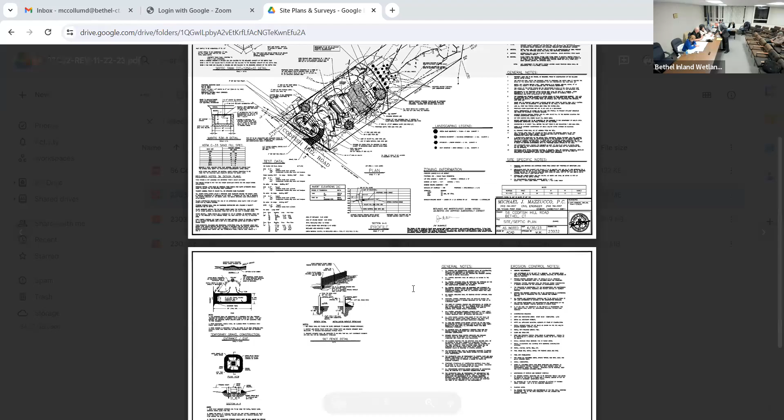And at the previous meeting, we submitted a draft revised plan. And we addressed the majority of the staff comments and the comments from the consulting engineer. And we talked about plantings. And I was waiting for Jim McManus to get back to me, and it took quite a little while, but he finally came through. And so we added a row of arborvitaes and then some other plantings just around the western end, southwestern end of that vernal pool.

Right. And for that, we had a landscaping legend and a few notes in addition to what was previously submitted in the draft. So that's kind of where we are, nothing really major since the last submission. And it's worth the commission noting that a digital version of these revised site plans was given to us last Wednesday, I believe. So they were in the Google Drive. Right.

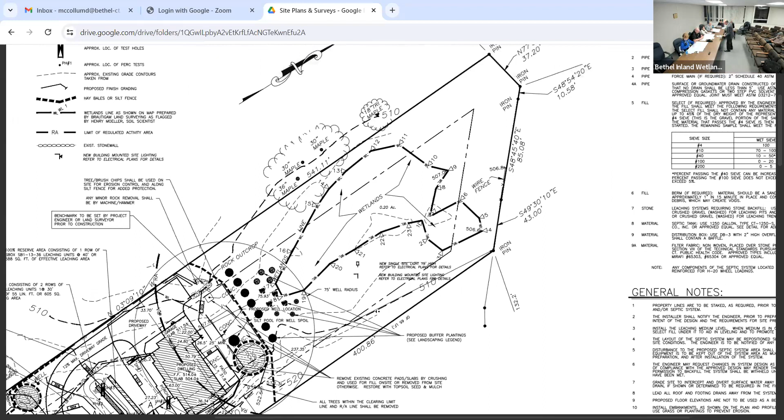So David, did you have any comments? Not at this time. The items that I had requested the engineer to address, the commission should feel comfortable with their responses. The applicant's engineer also forwarded their responses to our consulting engineer, Todd Ritchie from SLR International Corporation. I did not hear any feedback or get any response comments from him, so I'm going to assume for all intents and purposes, he doesn't have anything else to say, unless you guys have anything else that you want to discuss.

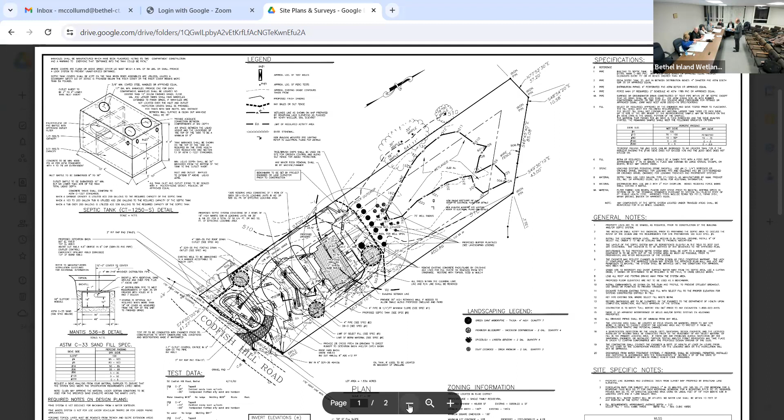I do have a draft resolution of approval that if you guys wanted to table this for discussion later on in the meeting, you can review how that is written at that time. Okay. Anybody else on the commission have any comments? No, not at this time. No. Nope.

Nico? Is that Nico or your dog? Oh, Joy has comments. That's the dog, but no, I'm all set right now. Thank you. All right, thank you, Nico.

All right, so I guess we can table this for later in the meeting, or should we take a vote now? I would table this. You do have a busy agenda. I think it's in the interest for everybody to keep things moving. And we can discuss this. What I would recommend is that you make a motion to table this and reconsider any drafts under your business items later on in the meeting. Okay, so yes. All right.

For the draft, do I need to stay around? Oh, if you would like to review the draft, I have hard copies, if you would like to take a look. I just don't know if I need to stay around for that. You guys may want to amend how the draft is written. I would want to confirm with you that the conditions as I've drafted them are okay. If you feel that there are any revisions that you'd like to make, of course, I would let you know what those are. Sure. If you want to stay, then I certainly wouldn't discourage you from doing that.

All right, can I get a copy of it? Sure. Yeah. Thanks. I'll just take a quick look at it. If I feel like I should stay around, then maybe I will. If not, then let David know. Okay, okay, very good. Thank you, Mike. Thank you.

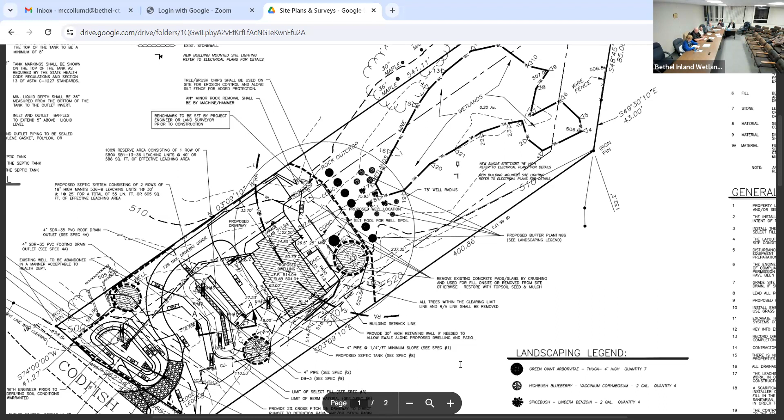Right, so I make a motion that we table Codfish Hill to later in the meeting under business items for review of a draft of approval. A second. And all in favor? Aye. Nico, you still with us?

Is anybody with us? Yep, there is. I don't know where Nico is at the moment - his camera and microphone are off. Sorry, guys, technical difficulties. Is that better?

You able to hear what was brought forward? We're going to table this until later in the meeting to go over a draft resolution that David typed up.

Okay, next on the agenda is 42 Nashville Road. And who do we have? Steve Trinkus, consulting engineer.

Dave, I want to recuse myself from this one because one of the neighbors is a friend of mine. I would ask you to recuse yourself from the dais if you don't mind. Okay, so I'll go outside. You can either wait in the audience or go outside, whatever's fine.

Steve Trinkus for the record, professional engineer. We received some staff comments from David around mid-November. We provided a response and electronic copies of a response and revised plans on November 17th. He had questions on the E&S stuff, which was already on the plans.

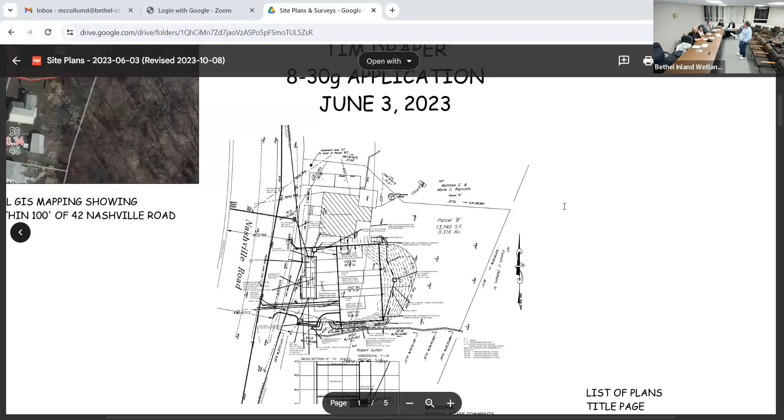The only other issue was locating the stream on the west side of Nashville Road. What I did from the existing catch basin on our side of the road, I went up at 25-foot intervals to the north and south, and from the western side of the road, measured from there to the edge of the stream with a tape. That's how I got the location.

There was an old Farnsworth map from the late 80s, which, having done surveying, I would take with a grain of salt because Farnsworth's work back then was not very accurate. So again, we just didn't pick one location - it's like every 25 feet, I pulled the distance over, and then we plotted it that way.

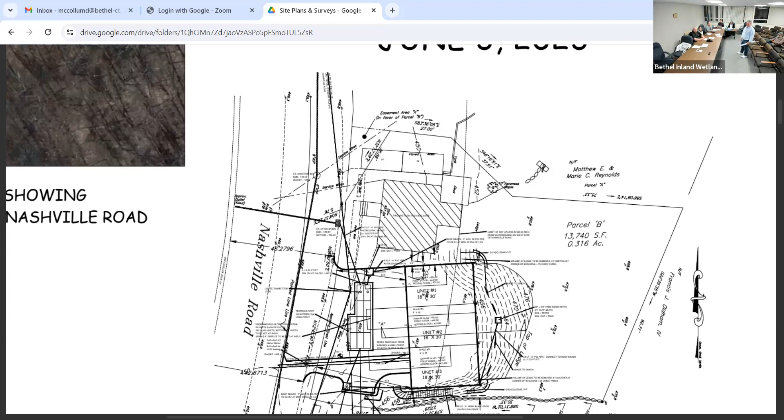Todd Ritchie has reviewed it multiple times, and we've addressed all of Todd's comments. Again, we're connecting to an existing catch basin, which goes under Nashville Road from the east to the west. The test pit that we had for the underground detention is all beautiful bank run sand and gravel. This is more of an overflow situation because I think every drop of water that goes in here is going to go into the ground and nothing's going to go to the town system.

For this application, it's pretty much what Mr. Trinkus said - my comments are my comments. You guys have to consider whether or not you agree with how Mr. Trinkus has approximated the location of the water course with him measuring it with the tape. If you feel that is a non-issue, then consider my comment just my comment.

I would say for every application you have reviewed in recent memory, you have had someone in the wetland science or soil science realm provide accurate information as to where a wetlands resource is. I don't want to dive into this too much because I've already acknowledged the wetland isn't on the property, so you're not really gaining much in terms of knowing where a resource is, but in terms of having it shown on the plans, it's precedent, it's procedure, it's part of what you guys have always done. That's why it was brought to your attention, so if you want to pursue that, you can.

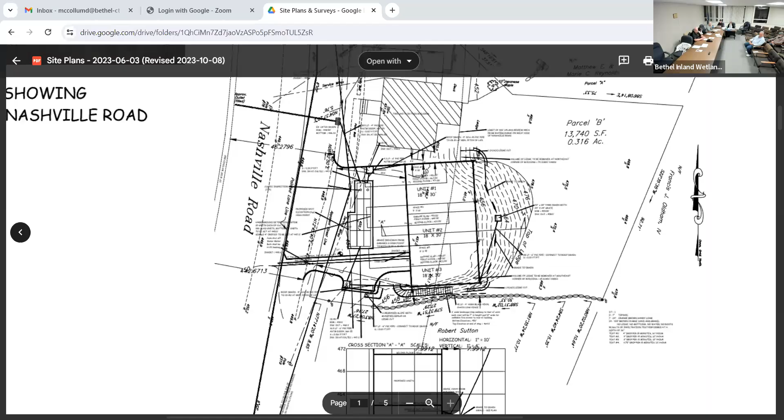The other item included in your staff report - and I will bring up the site plans again - is the scope of the area where work is proposed and where work has been done. If you look at the survey submitted as part of this application, its date goes to June 3rd, 2023 of this year. The commission should consider that this property has not always been in this configuration.

In other words, this area has not always been flat, and this area has not always been sloped. This work to change this, for what I can tell - and I'm putting on my zoning hat here to some extent, but also my wetlands hat...

This work was done earlier this year, before May 2023. You should consider whether any changes made to get the property to where it is now required some form of permit, whether part of this application, under a separate application, or if it needs to be addressed at all. It would be worth having that discussion with the applicant to see what their thoughts are and what your thoughts would be.

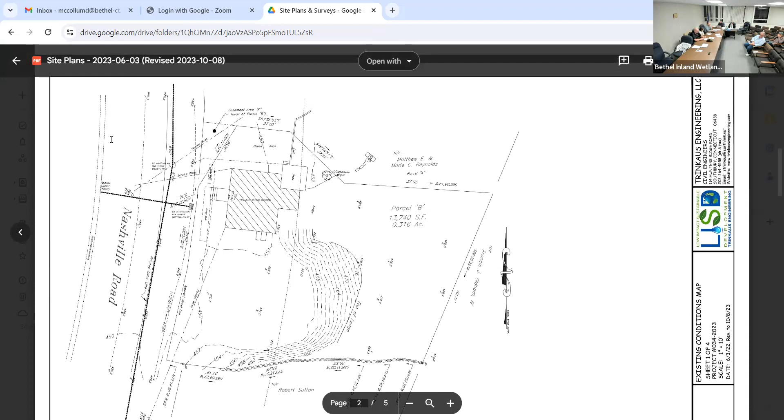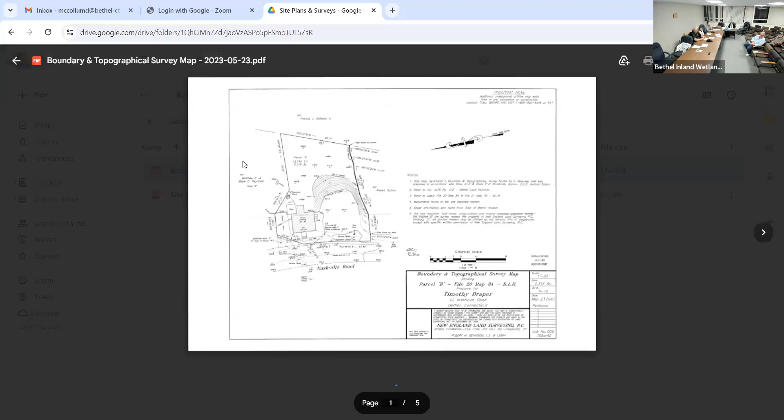Not a problem. So there is a water course across the street from this property on Nashville Road, shown here on this existing conditions map. When the application was submitted to the Planning and Zoning Commission, this water course was not shown on that survey. I will pull that up for you. So there was no trigger for any staff, or for the consulting engineer, Todd Ritchie, who caught it, to say there's a regulated resource and an ensuing regulated upland review area where regulated activities may or may not have taken place.

If that had been caught, then this would have gone to you first instead of the order in which it did, which is where we are now.

Right, so that was said much more eloquently than I did. You're welcome. So my question was...

If I'm understanding you correctly, there was work done before this appeared here, but was the work also done before it went through the permitting process for the other board? With the Planning and Zoning Commission, that's correct. Thank you for the clarification.

You're welcome. Just further clarification for the record: most of the water course on the west side of Nashville is actually piped. We didn't know it was an open channel in that area.

And a couple other points: since we don't own the property on the west side of the road, a soil scientist cannot inspect it, and a surveyor also cannot locate the stream there. A surveyor may only trespass to locate corners for tie-in purposes, not to locate other things like a house. Some owners, quite honestly, having done surveying years ago, even didn't like us looking for iron pins on corners, but we were legally allowed to do that. Other than that, a surveyor cannot trespass.

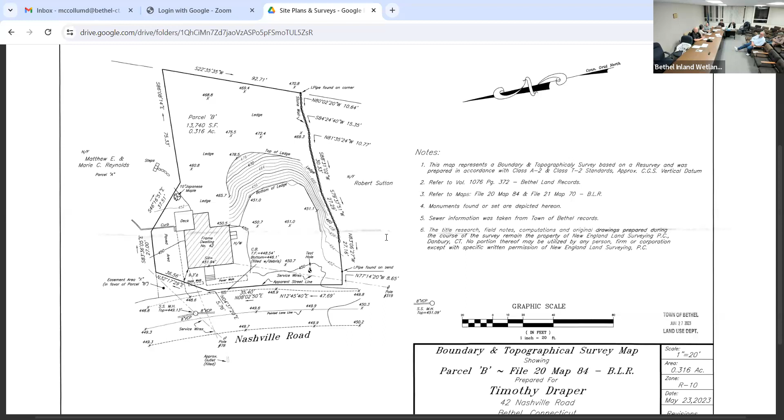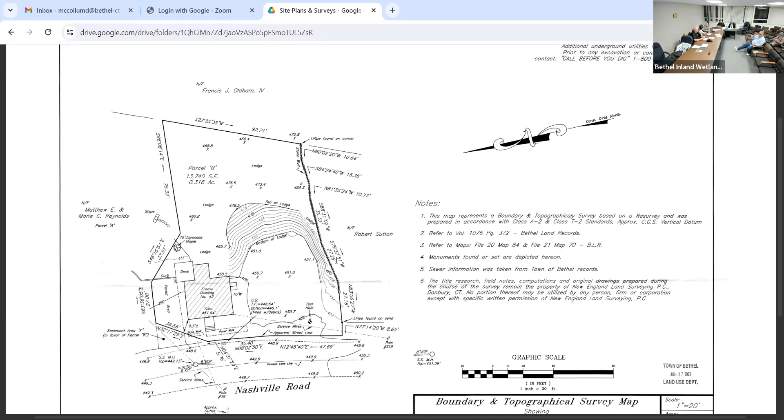When the surveyors, Matt Reynolds, who actually lives next door, went out there, there was some flowing water, but a lot of it comes from the pond further south on Nashville Road where the condominiums are. When the pond does not discharge, there's no water in this water course either. So it was, we missed it. If it was open there, it would have been located, but we obviously didn't. We didn't even know it was in the woods because most of it is piped.

Understood. Thank you.

I don't know if now is the time to ask, but how much of an issue would it be to put it as a stipulation to get a soil scientist, or to have the wetlands delineation indicated by somebody of reference history, so we follow precedent? The owner of the property across the road would have to give a soil scientist permission. If he doesn't, we can't do it. It's as simple as that.

Let's give it a shot. Worst they can do is say no, right? And it doesn't again, hurt that.

It's about what level of information you need to render a decision or to be comfortable with the activities being proposed. If you think a soil scientist is the expert that's appropriate to do that, that's at your discretion. Otherwise, you can choose to have the water course represented through some other means. Previous surveys, I don't know what exists out there. The survey that was located may just be one resource that exists. There's GIS mapping that could potentially be used, not that I want to speak to its level of accuracy, but it's another reference that could be out there. Just so you know what you can consider, what you have to work with.

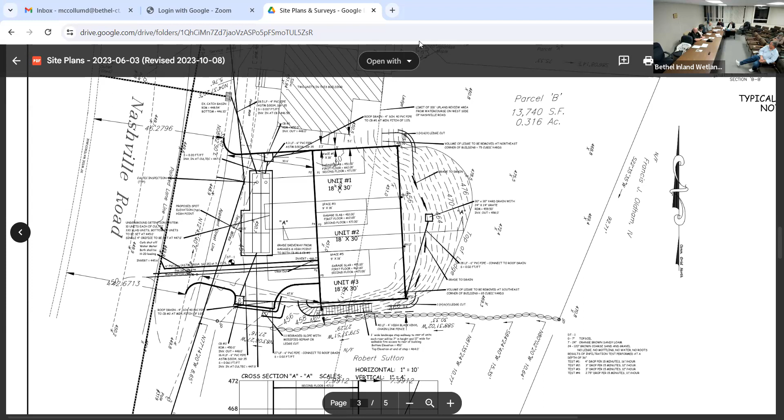Of course, I don't have it in front of me. There it is. The Connecticut Department of Administrative Services Consultants Procedure Manual, which I cited in the response comments I had for you guys. If you go to 3.3.6.1 of those standards, and I quote, all surveys shall be performed by land surveyors registered in the state of Connecticut.

The survey must include all areas that may be subject to construction operations, including access beyond paved roads and staging areas, include sufficient area, minimum of 50 feet from the proposed limits of construction to determine the consequences of drainage and wetlands. That's what that says. How you want to interpret that, it's left to you.

So that says that even if there's a water course or a wetland or a regulated wetland resource off-site from a property, that the applicant is still responsible up to 50 feet, you said? I'm sorry? Up to 50 feet, did you say? Include sufficient area, minimum of 50 feet from the proposed limits of construction to determine the consequences of drainage and wetlands. Okay.

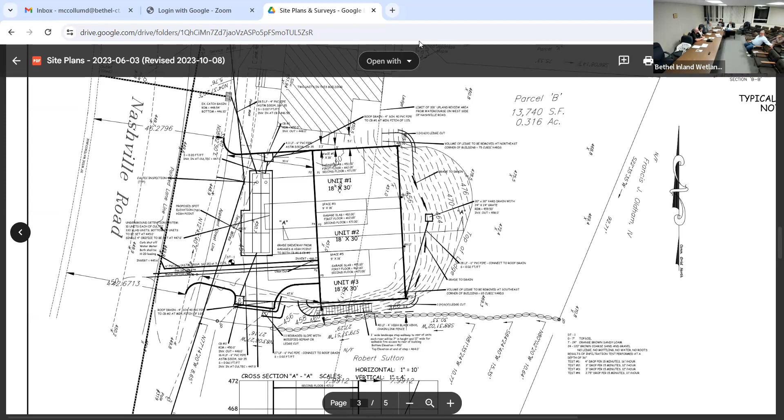Do my commission members have anything to say about anything we've been talking about? In my opinion, it's not a matter of distrust with whether or not the best course of action has been taken to delineate. I also want to take into consideration precedent. Right, and you mentioned that. And it's not distrust for any particular applicant, it's consideration for future as well.

I want to just put that out there, because even though I trust these guys, I might not trust the next person that comes across our table. So to treat one application differently than anything historically kind of puts a bump in our precedent. And I just want to take that into consideration when making that decision. We can ask the owner; if he refuses, it's end of discussion. In my mind, it doesn't hurt to ask.

Yeah. And regarding the administrative services, that doesn't govern what surveyors or engineers do. We're governed by the code of practice under the Consumer Protection Department and what your regulations are. And again, they cannot delineate off-site. You can take it from available information.

I have a site in Ridgefield where they had old topo from years ago. Same issue, off-site wetlands, and we approximated from old mapping and just put a caveat on there: this is taken from town topographic mapping, because that's the only thing you can do. Nobody has permission to delineate on another property without permission, but we can ask, and if it's not granted, then we'll have to work with what we have. To be completely honest, it would just be a disservice not to ask, that's all.

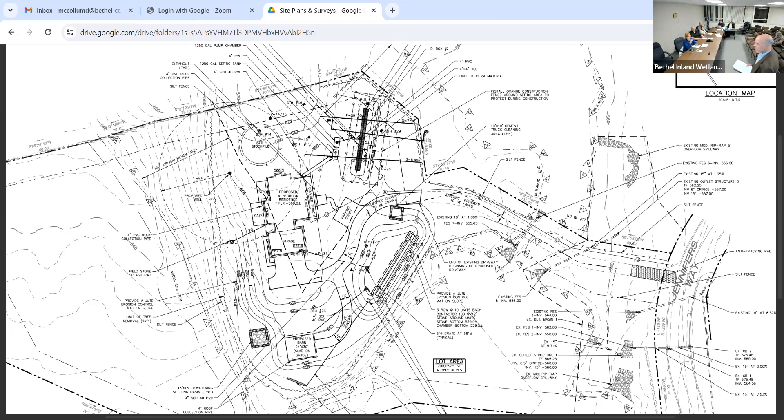So what we added on the plan was the limit of disturbance, which is the cloud line you're seeing across the plan. We added the footing drain outfall, and then we moved the concrete cleanup area as well per the comments. Other than that, those are really the only changes that were made to the plan. We did add the jute erosion control mats in areas where the slope is not 3-to-1, on the east side of the detention area and a little bit here on the west side of the proposed house. So those are really the only changes that were made.

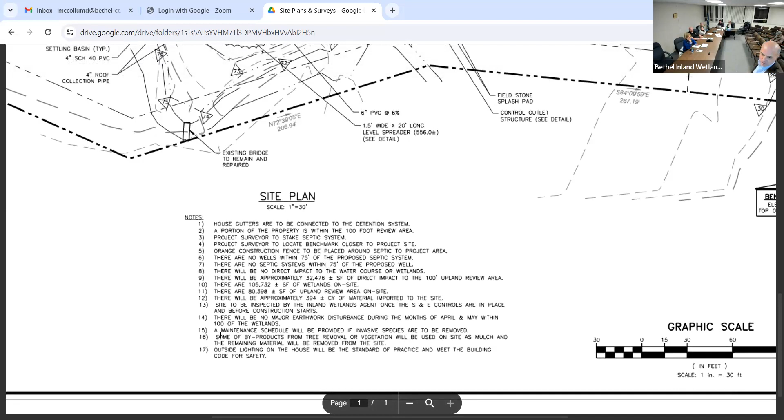I think you slide it up, Dave. Go up. I think we added another note at the bottom down here. So we added the maintenance schedules. We provided for if invasive species are found on the site. Outdoor lighting for the house will be standard of practice and meet the building codes for safety. And then there'll be no earth moving within 100 feet of the wetlands for the months of April and May. It's kind of standard; we had another project I did recently with this commission. And also we added the maintenance operations on the third page, and we revised the S&E control notes as well. So those were the only changes made on the plans from last time.

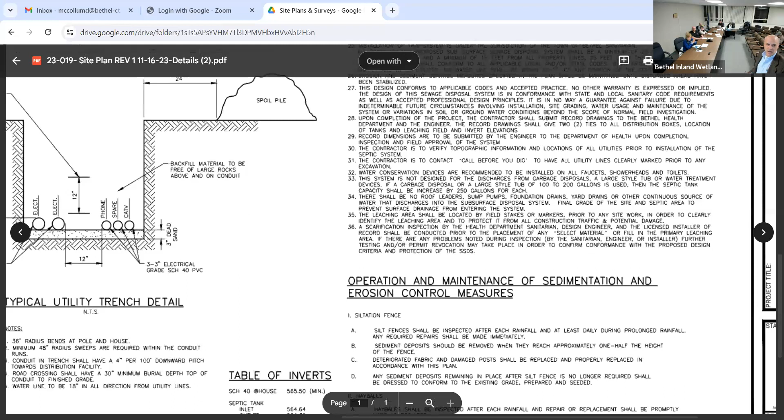I'm trying to find the third detail sheet. Two, sorry. So here's the operations and maintenance we added. Who's assigned to maintain the erosion controls, that would be the owner or contractor, things like that. So those are the changes that were made to the plans. In terms of going through Todd's questions and comments.

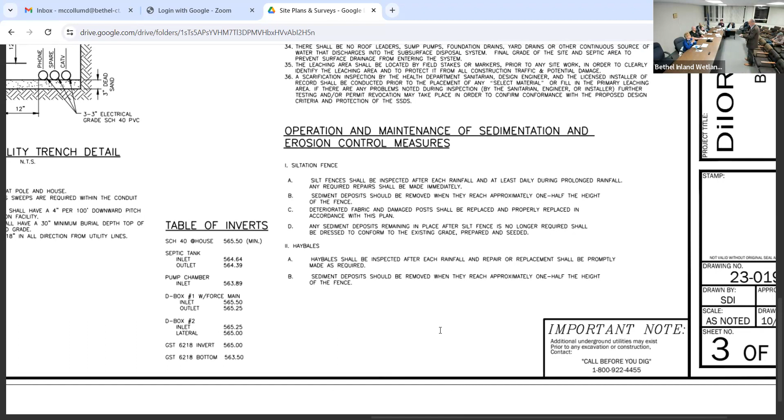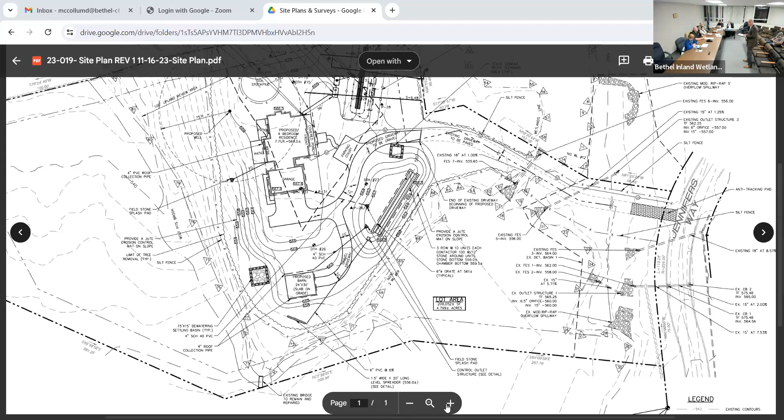At some point, we'll provide a signed and sealed Connecticut licensed surveyor existing conditions map. The wetland delineation, as Todd mentioned, is 18 years old. It's a vacant lot, and we felt that the wetlands haven't really been disturbed or changed, mostly along the brook itself. So we did contact the soil scientist to see if they can prepare something for us. I haven't heard back from him, so that's in the works. The jute mats are shown on the slopes greater than 3 to 1 on the west side of the house and the east side of the detention basin. Footing drains were shown on the plan. Limits of clearing were shown with the clouded area. The cement truck cleanout area was moved from the north side to the south side, closer to the detention basin area.

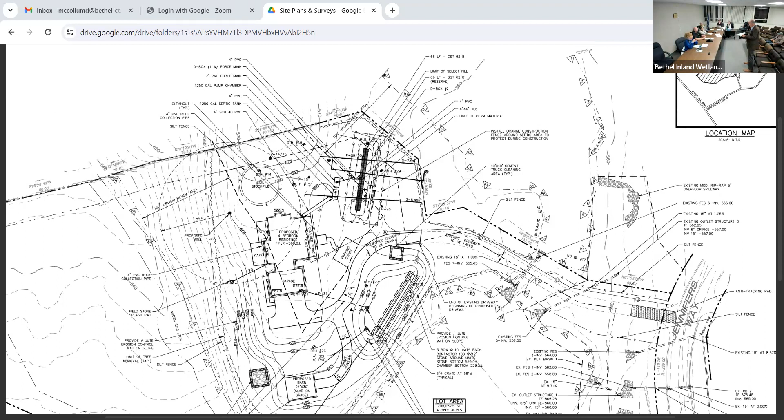And we have contacted the Connecticut DEEP Natural Diversity Database, and we're waiting for a response back on that. Todd has sent it; there is a blob on the map that shows there's something out there, but we haven't heard back what it is just yet. So I think that'll be a condition of approval. Once we hear back from them, we'll let David know what it is and do what they recommend.

In terms of the staff comments, footing drain discharge was shown on the plan. Lighting fixtures, we have a note on there for standard practice for light safety and so forth. Trees greater than 6 inches, we'll remove trees that are necessary within the area of construction. There are some significant trees out there, and our client would like to try to save them, but the majority of them, as you remember walking the site, are not that significant or that big. So we're going to be selectively removing trees out there.

Then again, the wetland scientists, we're trying to get a letter from them about the regulated area we've got on the site itself. A note specifying installation of the S&E controls was added to the plan for operations and maintenance of it. Then also the commission should consider whether or not vegetation buffers should be added to any area of the site, and that's a discussion that you need to make, not something we can provide.

And then again, Todd's asking about the database, or you asked for the database as well, which we're providing. And then we also added on the site plan the driveway to be paved, asphalt. We're showing the first portion, which is currently out there now, where you guys walk down from that point up to Jennifer Way would be paved, and then from that point on to the house would be gravel. So it gives a little bit more of a natural look to it.

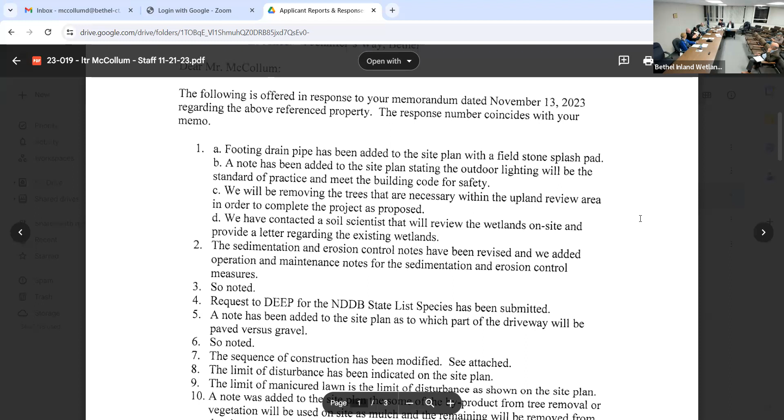Without having the benefit of that report or anything else to that effect, it's an unknown at this point. The applicant has stated that they will abide by whatever the stipulations are, and they legally have to, of course. So looking forward to hearing about the NDDB situation. Can I move on to something else, or did anybody want to chime in on lighting? Oh, go ahead, Nico.

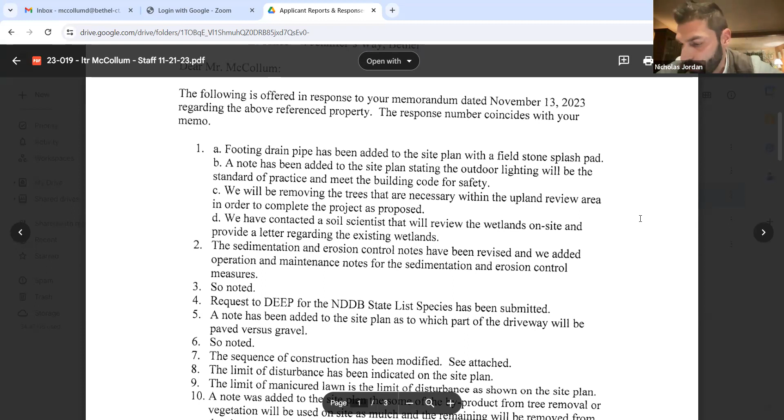What do you have next? Okay, another thing, seeing the paved driveway and then leading to the gravel driveway, what's the drainage situation with the driveway, Mr. DeVesta? I know it's an older driveway and probably needs to be redone, or what's the plan? Because I'm thinking of pollutants and what's best for the wetlands that it crosses, gravel or pavement? And I guess during the construction process is probably the worst time, correct?

Well, the driveway is not gonna be paved until after the project is done. So whatever's out there right now is probably a gravel base. Right now it's all overgrown from 18 years of being neglected. So it will be just gravel down there, a tracking pad at the entrance and silt fence along both sides of the driveway as shown on the plan.

And then after construction, water's gonna run down the driveway and drain into the detention basin itself, and everything is being sheet flowed from the house, and the roof leaders are all being drained into the detention basin itself. Oh, sorry to interrupt. So the driveway is pitched toward draining to the detention basin? Right, correct. The gravel portion is being drained in there, and as you walk the site from Jumper's Way, it's going downhill towards the detention basin itself.

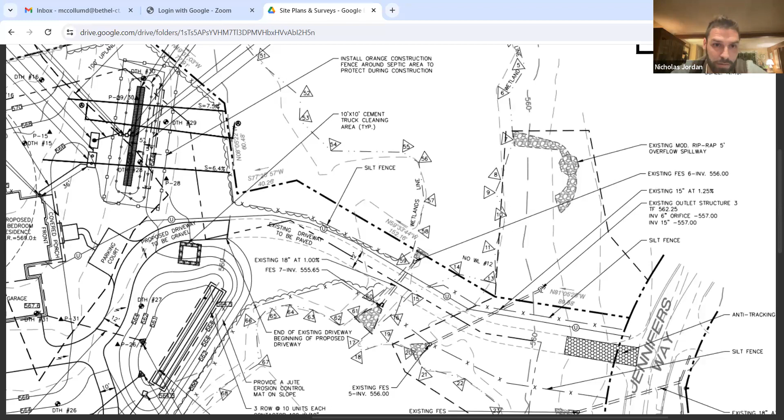Okay. The only thing that I saw was the pipe leading under the driveway connecting to the watercourse, like the wetlands. There were several pipes out there. Again, it was all overgrown. One that was visible was a culvert that ran underneath. This one here was probably existing, that one and this one here is there as well. The one on the right, yeah. With the leaves down, you can probably see that catch basin much easier, but there is a detention basin in there, and also on the south side of the existing driveway.

Nico, did you get your question answered? Because I have some related. Oh, yeah, go ahead. This is our discussion time. So the driveway and the pavement, whether that should be gravel or paved, and the runoff from that driveway, where that's going, that was my question and concern.

Well, the driveway, we could make it gravel further up if you like, but it was intersecting with Jennifer's Way, it's a slight hill there, you want to make sure that's paved so it's easier to maintain, things like that. It might be better to have it more gravel over the wetland. I don't know, from an environmental standpoint, Dave or Mr. Doug, to have that be gravel and infiltrate, it just seems more natural to me than the pavement over the wetland area there.

The idea with gravel versus pavement, it's not so much trying to figure out which one is better per se, because they each have their pros and cons, right? The idea is, if you're going with one in one area, is it designed so that it will not have any adverse impacts to the regulated wetlands resource that's either on or off the property? The question that you're asking, I think, Mr. Jordan, isn't so much where rain is going, so much as where anything that's in that water that would flow off that driveway is going.

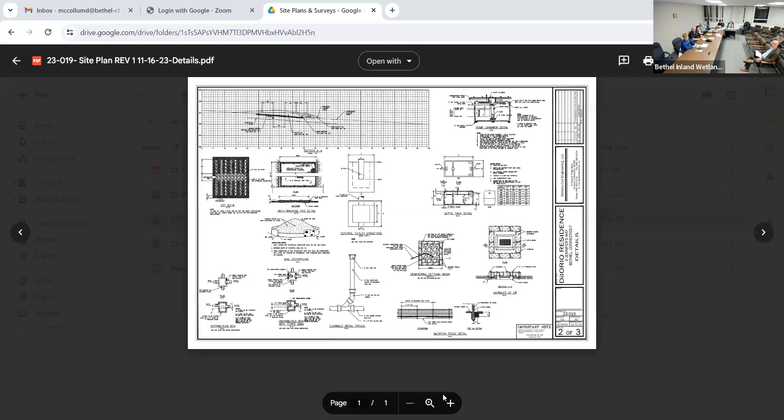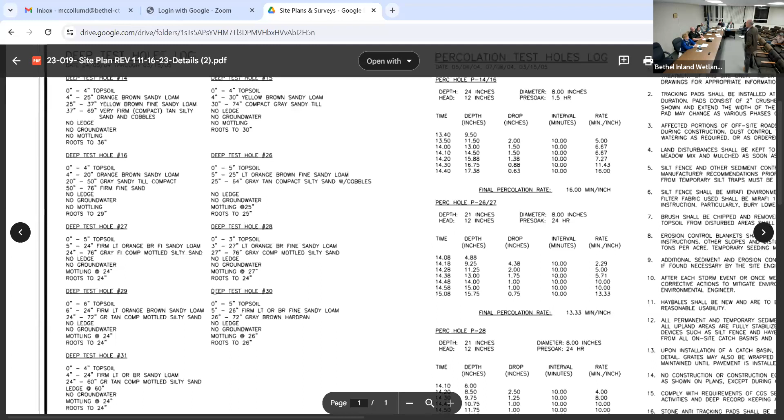Mottling was between around 24 inches and a little deeper in some spots. But that indicates that mottling is a seasonal high groundwater indicator, but it doesn't mean it happens every year. It could be historical. So there's potential, there could be groundwater and there could not be out there. And then the hard pan layer was probably around the same level as your mottling was on most of these holes. Again, there was no groundwater encountered during that springtime when these things were tested.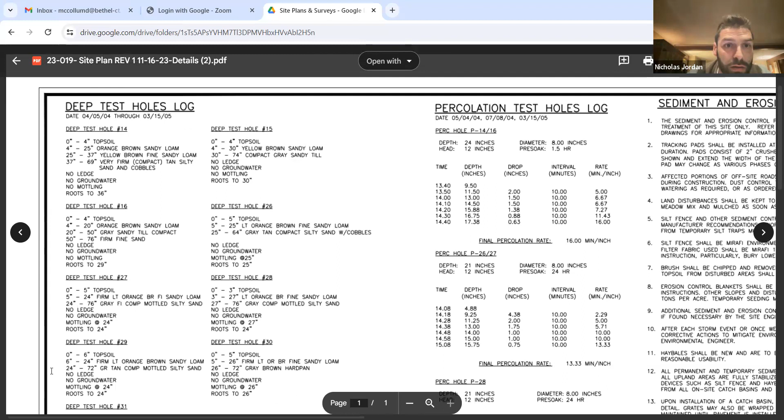And where, okay, and to what depth did the mottling begin? Around 24 inches in some spots, it depends what hole you're looking at. So can you walk me through it, I think it was deep test hole like 29, 30, 28, near where the septic is, right? Back to number 1, Dave.

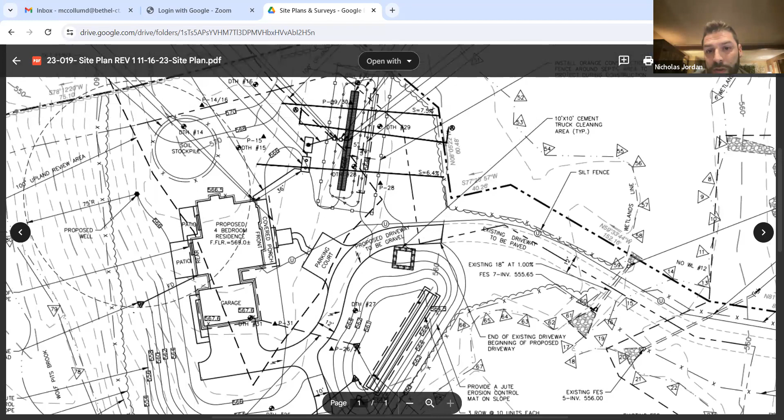What, the septic system you're talking about? Yeah, I guess so. I mean, I'm concerned about the whole site, but mostly that eastern portion. Yeah, 29, 30, here's 30, right, 28, here. 28, 29, and 30. So go back, okay, number 3.

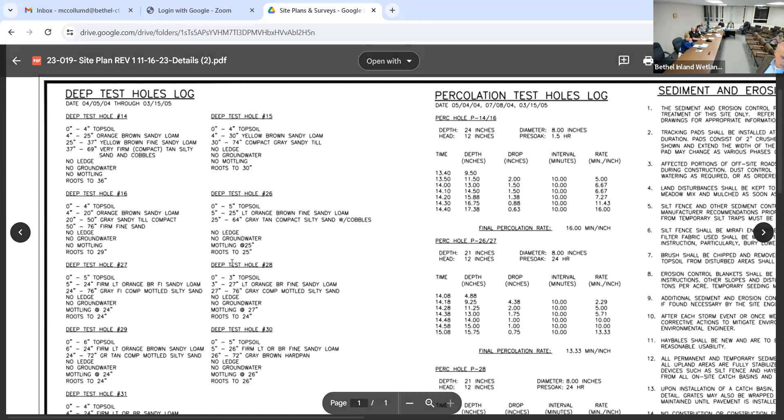So you have 27, 24, and 26. I just want to make sure I'm reading this right with you, so I know. So the mottling, are you reading for number 30? Oh, 26. Okay, 28, 29, and 30. So mottling was witnessed at 26 inches starting, right? 24 inches on 29, okay.

So that means that's like 2 feet, just over 2 feet to 5 feet, or what? No. Yeah. Between, again, 2 and 3 feet. And these plans that have been through the health department have been approved by the health department. The septic system meets the minimum state health code of being 18 inches above mottling. So you've got 20, 18.

Okay, I want to just go understand all this with you. Another question, yeah, just so, what is for the septic system, it has to be, what did you say, 18 inches above groundwater mottling and hard pan?

So 24 inches, so you're potentially 6 inches into grade, and you fill above that to get to the bottom of the septic system. So the system is just sitting just into grade. It only needs 18 inches, the septic system, did you say? No, it's 18 inches above groundwater mottling and hard pan.

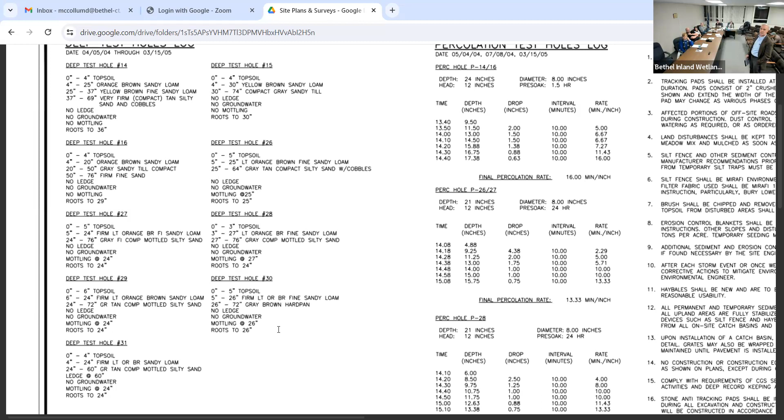Okay, and then how much distance does a septic system need, how much soil to function? 18 inches. You said the state wants you to be 18 inches above groundwater mottling and hard pan, the bottom of the septic system. And okay, it depends what kind of product you've got. You could be anywhere from 6 inches, 12 inches, 18 inches, whatever, up, and then plus a cover on top of that. Okay, I'm not familiar enough with septics.

If you go to page 2, that's what I'm asking, my cross section, that might help clarify it. Thank you, because that's one of my main concerns, and I feel like if I could understand it better, maybe it wouldn't be so.

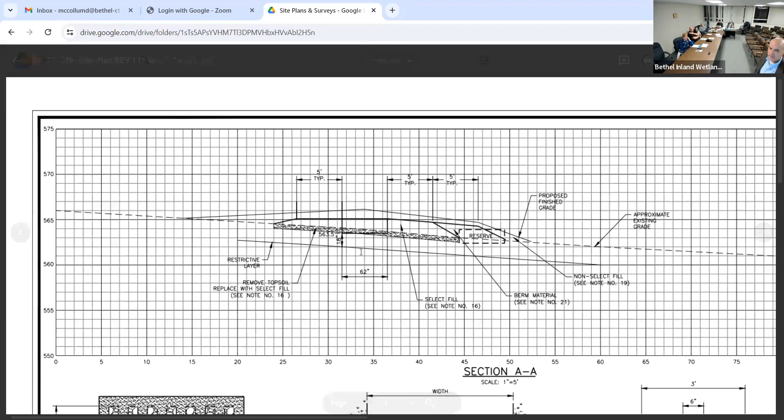So what you're seeing here is the dashed line is the existing grade going through section AA. Then the line below it says restrictive layer, that's the mottling layer. So that was 24 inches. I did this at 18 inches. So yeah, 24 inches down, the bottom of the septic system is 18 inches above mottling. And then...

The dotted area is your topsoil. You've got to take the topsoil off per state health code, and then you bring in fill above that. So you see a select fill area, we're using an 18-inch high product, and then you bring in fill. You bring in probably about 2 feet of fill by the time you're done with some cover over the system itself. So again, this has been reviewed and approved by the state health, by the local health department. Okay.

So are you considering the mottling layer as a restrictive layer? Correct. Okay, thank you.

Anybody else want to comment on that now that we're talking about it? Commissioners? No comments, but that was helpful for me for future stuff too. It helped me understand a little bit more about the necessity for your variance. Yeah, it's super important because otherwise the groundwater could just take the septic with it to the wetland. Yeah, that's why they have a health code. Yeah, of course, but it's good to understand. Help me understand, but I need to understand the health code, like it should approve it for the wetland, but anyway.

Segue in, or I guess the last thing was kind of the vegetative buffer, buffer zone between the brook or our regulated wetlands and the limit of disturbance and the lawn areas, which were deemed to be the same, I guess, I heard. Yeah, I had questions on that too, and I was just curious what the proposal was for, or if there was one, like what are we looking to do for vegetative buffer, if it's a necessity. I didn't see too much information there. We really didn't show a buffer on it, and that was something that Dave had a big discussion on.

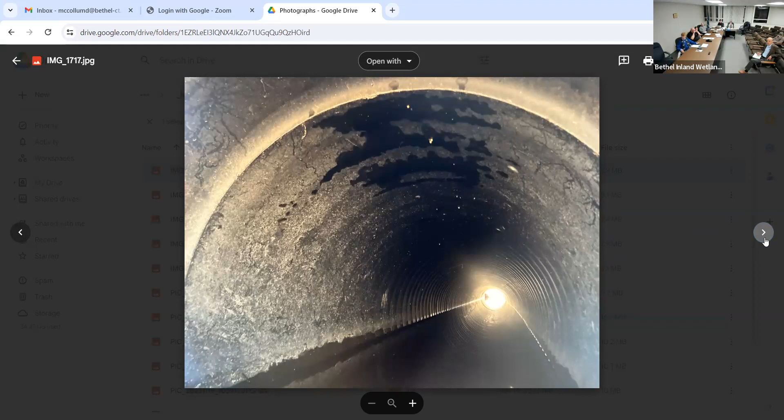This is a photograph I think that you took, Nico. Yeah, I think it's one of the culverts by the driveway, under the driveway, looking north to south. I was trying to follow the flow of the water from that wetland to the northeast. This is inside one of those culverts, I imagine - yeah, it's made of high density plastic, I think.

We won't know until we get out there and remove some of the scrub growth. I can appreciate it's hard to know for sure, but that's within the wetland area, so it would certainly be disruptive and something I'd want to know about. So I don't know how we address that. That area is pretty flat there, right? I assume when the subdivision was done, that was done to about 12 or 14 feet wide. Okay, and I don't have any idea how much space - 12 feet is your typical driveway, but is a typical driveway enough to accommodate the size of the vehicles that are gonna be needed? Okay, thank you.

Not to answer for Mr. Devesa, but I think the simple answer would be it varies. Right. There is no uniform distance that the limit of disturbance will be from either the wetlands or the water course on the property. Can you scroll down to the south end of the map, please? Okay. Thanks.

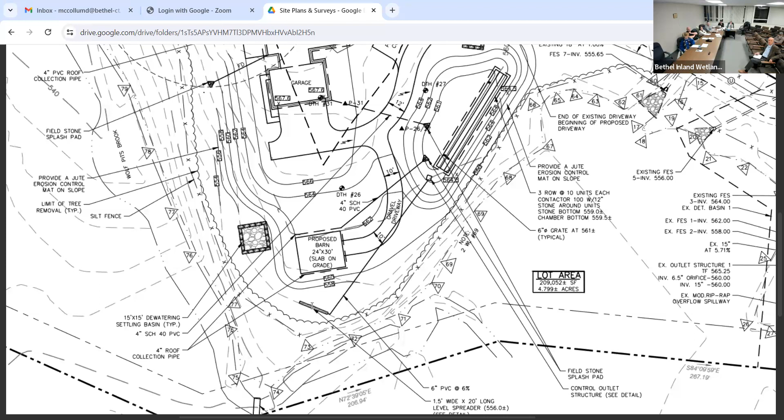Right, the silt fences will be placed at the top of the bank, in the embankment, not down along the brook itself. Flag number 70 is where the brook comes into the property. Right, and we went out around it to get machinery back there to put that level spreader in. Again, it could be tightened up a little in that area. And where 75 and 74 are, that's quite a ways away from the limits of disturbance. But David, right, the limits of disturbance will vary from point A to point B.

Right. My only concern was that the vegetation and the roots would remain to keep holding the bank so it wouldn't erode out, because it looks like an erosive point in the river. Right, if there's trees within the embankment, from the top of the embankment down to the brook, those aren't going to be removed, no. Okay. We were envisioning just straight lawn all the way up to the river. No, it's not. Again, you have a fairly steep embankment down to the brook. We're not going to be putting lawn down there, no.

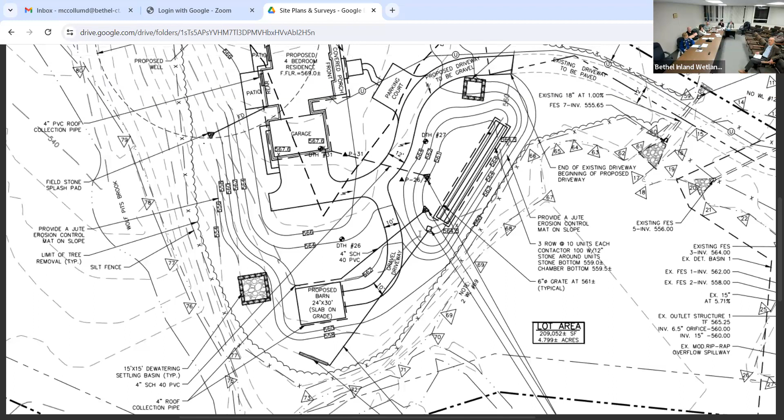On the west side you're talking about? I'm talking anywhere from flag 68 all the way around to the north side there to 83, I think it is. Okay. So we're obviously not going down into that area. I asked just because the vegetative buffer is so important to keeping pollutants and excess nutrients contained and out of the water supply, and preventing erosion in a case like this with an open water course.

And my dog is crying at me.

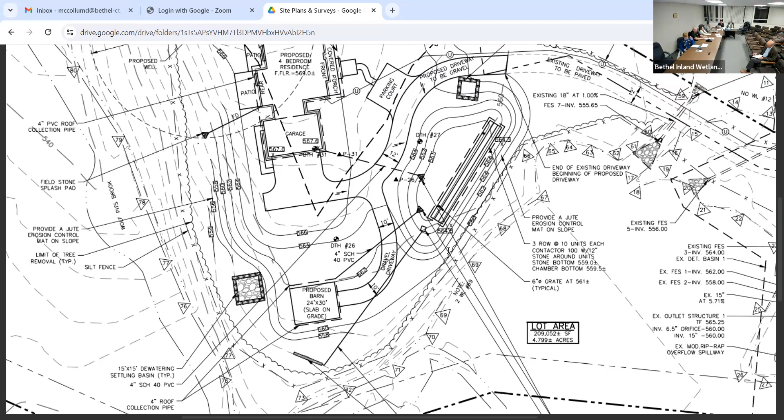But, thanks. Does anybody else want to comment on this? Was this the vegetative buffer that we were talking about, David? Was this what we were supposed to be discussing, or what was that all about? It was an open question. The discussion was meant to be any way you chose to take it. So, are we doing good? If you thought this was a concern, then share it with everybody, make it known. If it's not, then my comment is my comment. So am I doing good? I'm saying yes, it is a concern, and yes, we're talking about it.

Okay. Well, I agree that it is a concern, but they're gonna maintain pre-existing trees, flora that's out there. I wouldn't be as concerned about having to put anything additional in. I would like to retain what's naturally there to begin with, which is what it sounds like. It's the smartest, best way to do it. Agreed. If that's the intention, that's a better intention in my perspective.

So the only thing I would add to that would be to address Nico's concerns, which I'm not sure if he voiced yet, but he will. I hope so. The lighting in the back of the house, whether or not you would want to put some sort of a vegetative buffer there in order to minimize the impact on the wetlands. So I have a question. In other applications, we've had a lumen chart, correct? Will there be one for this, or is there a need for one?

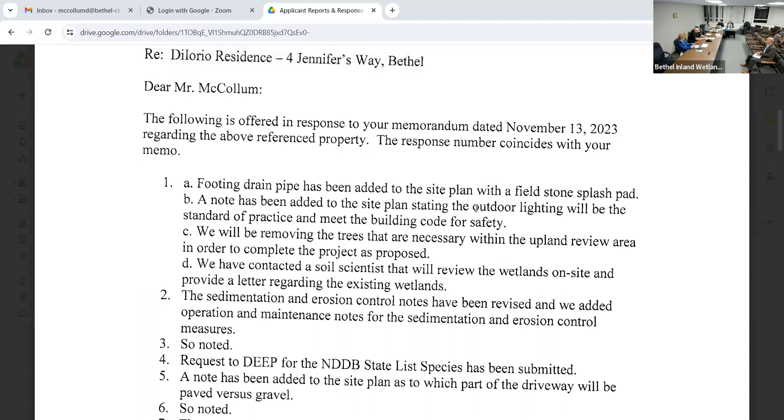I guess naturally. Just look at the contour lines, the tighter they are, the steeper it is. And this is your upland review area right in here. So at this patio here, you're almost 100 feet away from the wetlands itself. Here, you're probably 80 some odd feet away. This one's probably maybe 70 plus feet away. So you're quite a distance away from it.

And plus elevation wise, let's see, this is 66. You're probably talking 20 some odd feet higher, if not more. It's pretty significant. So you're really elevated, so even if you had downlighting, chances are it's gonna be visible from a distance away from the property and the house. But I think your concern, Nico, is it gonna draw wildlife towards the house? Am I correct? Or that it's gonna impact movement patterns?

I mean, yeah, sure, if you wanna talk about it from an insect species and nocturnal mammal point of view, yes, but you can talk about it from a human point of view too, and just having floodlights on the back of these patios in the middle of the woods there is going to be an eyesore. That's not our problem. So we don't have to talk about that then, but then we will talk about the birds, whatever you want.

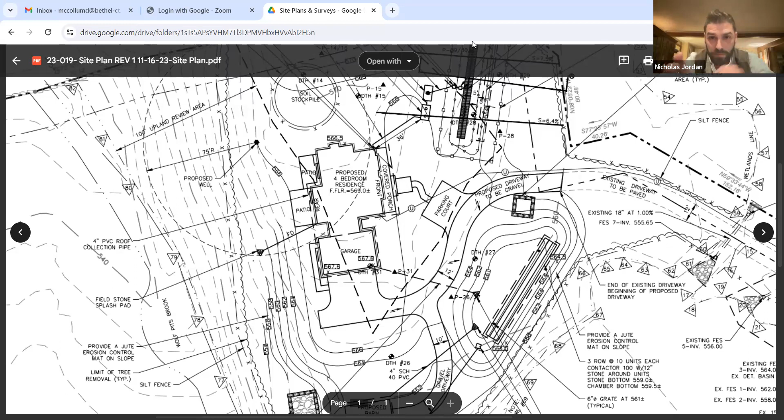If you ask for a photometric of this plan, you're setting your precedent now. So it means every single family house that comes in here with wetlands on it, you have to have a photometric plan done. I mean, so be it, but also this is a very sensitive site that's completely encircled. Our upland review area is almost the entire property. It'd be a nice thing to have for the site. It would be nice, yes, I understand, but it's not worth it. I understand that, Mr. Jordan.

It's difficult to request the applicant to produce a photometric plan when they don't even know where the lights are going to be. Well, it's not explicitly written as such. Isn't it part of our application items? Hang on. Building lights are part of the code. Right, but the response that was given in Mr. DeVessa's report, and I quote, "A note has been added to the site plan stating the outdoor lighting will be the standard of practice and meet the building code for safety."

So the lighting that's on the house isn't shown on the plans. So it's hard to say where lights would be and where light would go if that's not anywhere on what you've been given thus far. But we're asking for that. Isn't that one of our application documents to receive? For outdoor lighting? It's not a standard requirement, no. Nico, I only brought it up because in some of the multi-unit dwellings we've had it in the past.

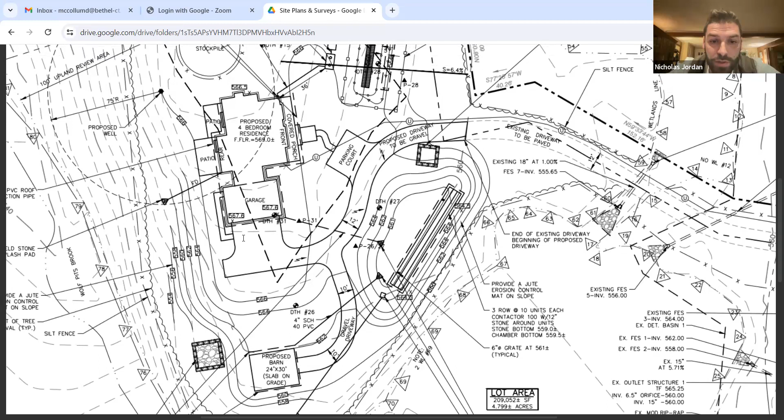You know, that's for, so, garden, what have you. For example, right, and then there's the barn, Dave. Yeah, go ahead. So I can envision two small, like, down, you know, I don't know what they call them, like hooded lights, or something, however many, to guide traffic in.

But then are they going to put floods off the back? Are there going to be side lights onto this yard off the side of the barn, or something? Why are they gonna flood the backyard? I don't get it. I'm asking. I don't see it on the plans. Yeah, that's the other question. Who's gonna regulate this and regulate it in the future? Because even though it's our job. Yeah. Our job is to do that.

Regulate, you have Dave go out there and check the luminance on the lights then, every 5 years? Mr. DeVesta, excuse me. The lighting, site photometric plans, including lumens and color temperatures, is a very standard thing in your line of business, is it not? For commercial, yes, but not for this. Okay. Well, this is an environmentally sensitive site. For a residential property. So if we're setting a precedent to manage the lighting, so be it. So then we gotta do it, and everyone's gotta do it then.

And nobody said that. We're talking about this site, this application, right? Doesn't matter. And who does that fall upon to regulate is the question. I know it's our duty to enforce it now during these conversations and these stipulations. Yes, it is. But I don't think that it's a reasonable request to have Dave travel to multiple single family dwellings. That's not within the purview. Why are we talking about that? So that's where mine is.

So if we can write something that makes an enforceable rule that at this time can protect it in the future, that's a good rule to have. But in this case, I think we have to use a little bit of common sense, and that's why I was saying they're not gonna be putting up stadium lights in the back, and why would they be shining lights into the wetlands behind the barn? That doesn't make sense. I don't know, but it's not on the plan, so we don't know what they're gonna do, right? We don't, but they could bring in elephants, I don't know. No, come on, guys.

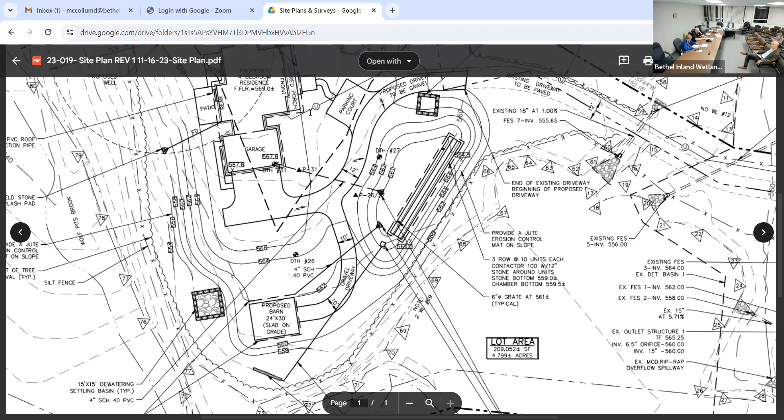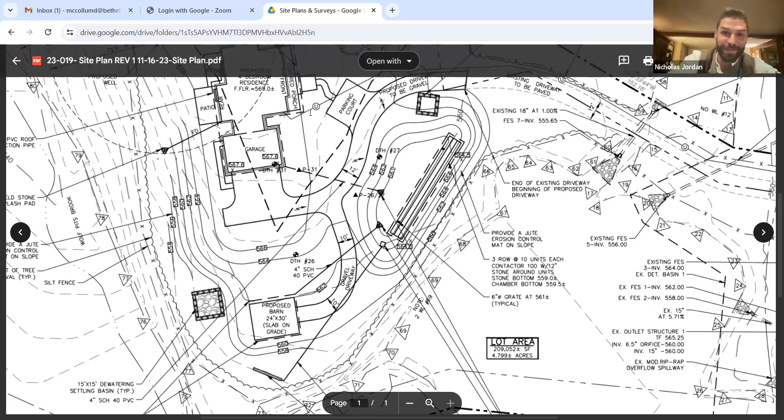And the upland review area as well, David. Excuse my correction, I was just reading about it in the report you sent to us. If there's something that occurs within the upland review area that could adversely impact a wetland, then yes. Yes, we're talking about construction in a completely upland review area, basically. I'm not meaning to argue. I don't want to argue with you guys. Okay, I don't think that we're gonna get much more out of this conversation.

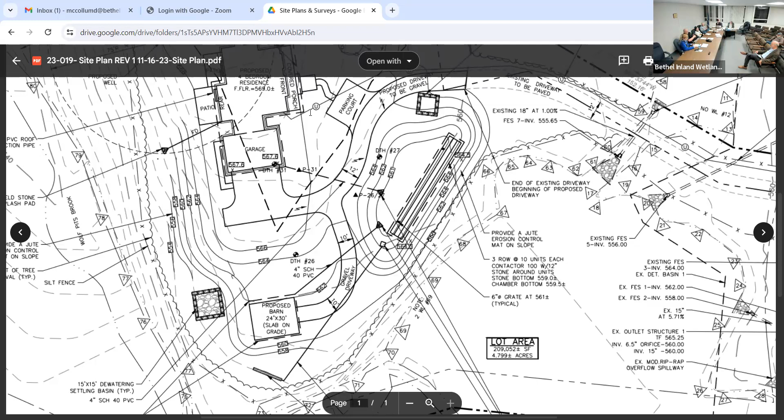I agree. And the conversation itself should lead to our determination on what we're gonna do as a course of action, because we're kind of just being circular now. So we're gonna have to make some sort of decision on next steps, at least. So what do you want to do? Do you want to wait to render a decision at the next meeting? Do you want to have the applicant provide you with the soil scientist information? What are you looking for as part of your next steps?

I would like the soil scientist in delineation, if that's reasonable. Do you want that as a condition of approval if the commission were to decide this application favorably? Or would you want that before you rendered the decision? That's what you guys have to be comfortable with.

I'm comfortable with accepting the application, approving it with the two stipulations. But if you guys aren't comfortable with that, then you have to make a motion to move it to the next meeting for a decision.

I want more information about the gravel driveway, the runoff, the herbicides, and I don't know whether that's something we ask Mr. DeVesta to produce, or something I research on my own. If you research on your own, share that with the commission, it should be part of the record. If you need time, and want to share that at the next meeting, you should make that known — that is something I want more information on before I'm comfortable rendering a decision.

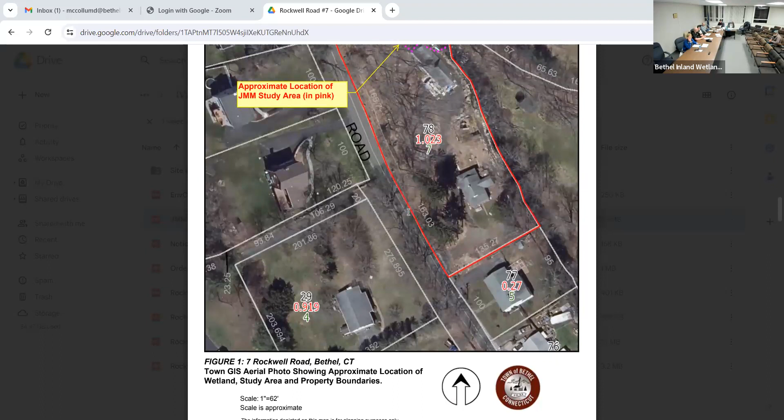Without trying to speak on his behalf, it describes the condition of the property with respect to the area he delineated. It goes into the restoration plans and some of the activities Mr. Bjorken would conduct as part of that. There's an implementation and monitoring section at the bottom of his report, along with an aerial photo showing the approximate area he studied, where he located the watercourse and the property itself.

There are some photographs that were taken of the property. This one is to the south, if I'm not mistaken. The water course is flowing to the foreground. This is of the eastern bank of the study area, taken from the west, showing that footbridge that exists out there now, the one you used to traverse the property during your site walk on the 19th.

It is worth noting that Mr. Bjorken and his soil scientists were given review comments, which were included in the Google Drive for tonight's meeting. It's worth either Mr. Bjorken or Mr. McManus having some kind of response to those comments before the commission renders a decision. I don't know if you've had a chance to take a look at those - they were emailed to you and Jim last week.

So I just want to make sure - no, I didn't. I'm not familiar with the question. So without answering those comments, are we able to even think of reviewing it right now?

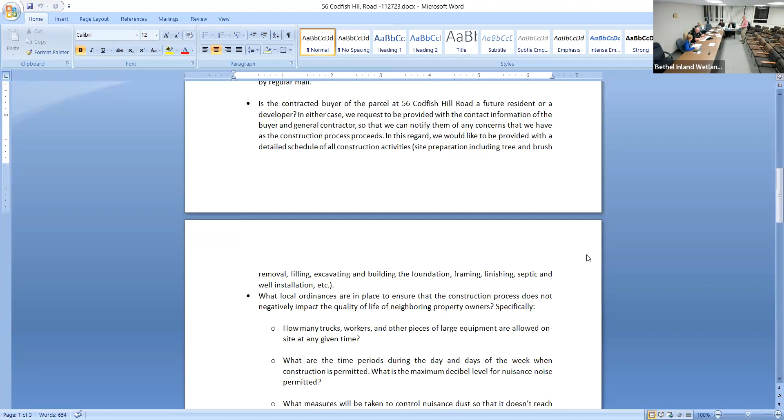My name is Arthur Dow, owner of 58 Codfish Hill Road, which is just to the west of the property that's up for our review. Lived there 20 years, and I saw from looking at records that Mr. Evans owns the property and I guess he never developed it, years went by, and kind of all of a sudden this sale went, or is pending, I guess, this application.

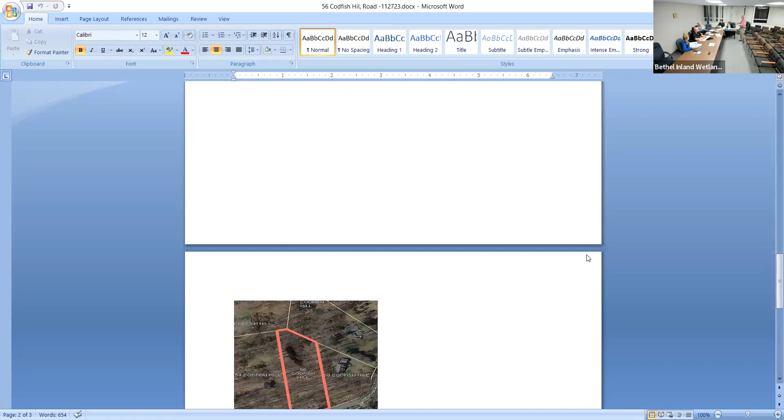So it's kind of an interesting thing because it's got the wetland, so it's not going through just the regular permitting process, it's going through you guys. I realize that a lot of what I'm discussing here and requesting doesn't deal with wetlands, but it's still important as a homeowner next door. If you read the introductory paragraph, our family is not objecting because it's somebody else's land. We could have offered to buy it. I guess we didn't because there might have been issues, but now it looks like it could be approved for a building lot.

So we're just concerned about all of a sudden machinery showing up and a lot of dust, a lot of noise. That's the short run aspect of it. Obviously, there's the privacy issue of where the house is placed. I saw the drawings, the plan where it's supposed to be. Hopefully it could be a little more to the front, because if you look at the picture of the lots, that would provide more distance and it would be a win-win situation for the people that are going to live there and for our family, to not walk out in the yard and be right there. It's kind of like you move there because there's a good distance between neighbors.

I think the subdivision of this lot that took place just before we bought it in 2002, they did the minimum setback they could do to get the most bang for the buck and make another lot that they could then sell to Mr. Evans. He actually bought that, I think, about 6 months before we bought our house there. We love our neighborhood. I kind of feel, when I say this first bullet point, it would have been nice if everybody got a letter saying these meetings are going to take place. I would have come back in September, and I didn't find out till I followed up with Dave. I talked to him way back in the spring and there was nothing going on, and then all of a sudden I saw something on Zillow that said the thing was pending at some point. I think it might have been during the summer.

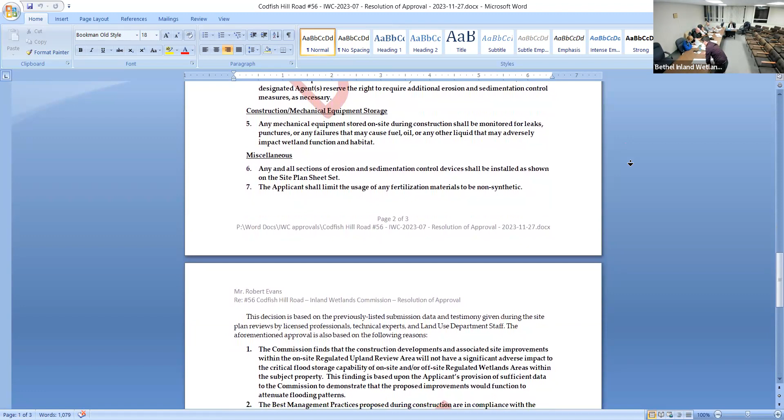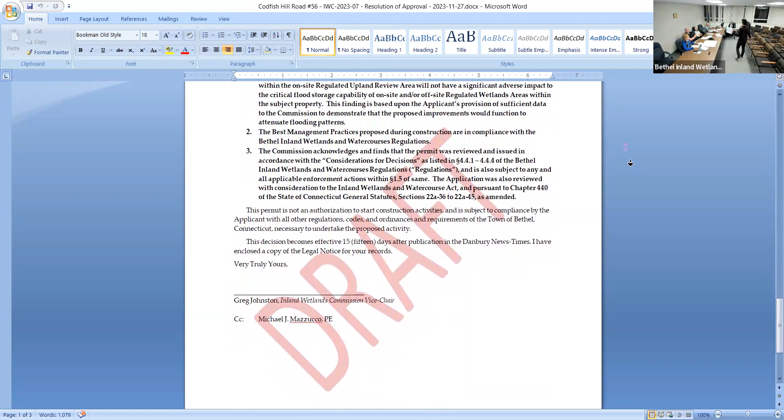What's the noise ordinance in Bethel? Do you know, Dave? I don't think we have any. No, there is a noise ordinance. Off the top of my head, I do not know it. But I do know for zoning, you're only allowed to conduct excavation activities from 8 AM to 5 PM, Monday through Friday, no holidays or weekends. What about leaf blowers? That yard equipment may be exempt from the ordinance.

Can I ask another question? Can other construction happen at any time, other than just excavation? Well, there's a noise ordinance. I don't wanna get into what that entails, because that's not part of this commission's purview. It's a question that I would perhaps be better equipped to answer later. I understand. Okay, stop scrolling.

Are we good? Refresh my memory. We wanted to add a stipulation, did we not? I think there was a stipulation, correct me if I'm wrong, about plantings. Nico, did you get all of this? Well, Mr. Mazzucco was here. He just ran us through it. He told me he was leaving, he was okay with it, but he put the line of trees on here. Is it listed in the items? He put a line of green giant arborvitaes.

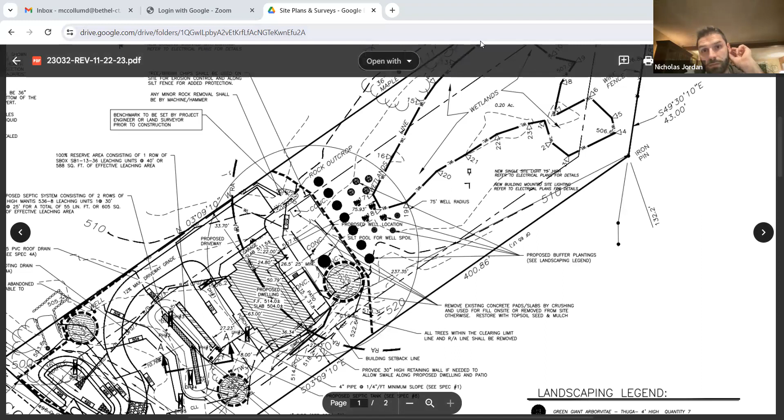I don't need them there because there's gonna be that tree break there, and I think it's gonna be unconducive to walking in that space. Yeah, I don't think they're gonna wanna walk in that vernal pool. But it's their backyard. I don't care that much. I don't know. Then why are we using them at all? Why have them? Why even talk about it?

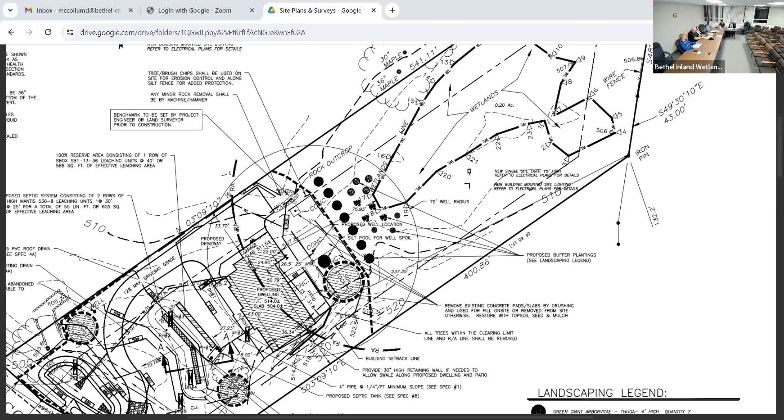You know, kids go everywhere. Greg said, I know, the only person that's gonna read that is a kid. If you guys don't want to use them, right, I'm only suggesting using them because we've talked about using them. We had that application a long time ago where there was a lawn running down, and then there were gonna be grasses there. It was Walnut Hill, you remember that one, Nico? Yeah, and it seems to me it was good to really denote it, because it wasn't so clear.

But after walking this site, I'm not sure that it matters, I don't know. If anything, a body of water like the one in that application, if I'm remembering correctly, was so much more obvious. Here, it's a vernal pool. People don't know what to make of vernal pools necessarily. They're just low depressions in the landscape that are overgrown with weeds to most people probably.

Well, if those commissioners that were there for the site walk can recall, when you observed that flooded vernal pool, it was pretty well flooded. There was standing water in it. That may have been unseasonable for that time of year, but a vernal pool is exactly that. At some times of the year, it can be a pool.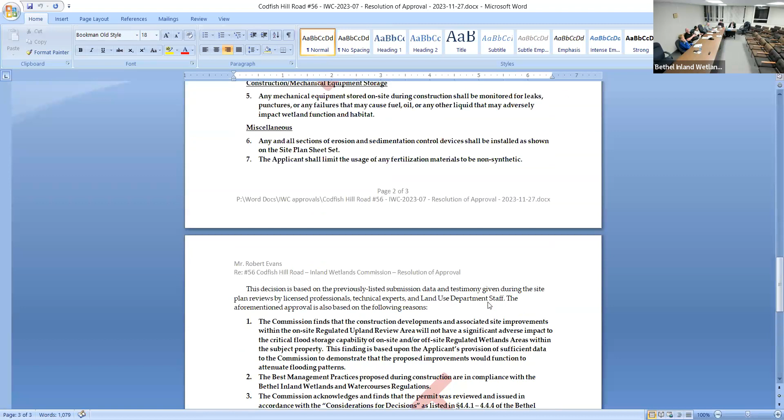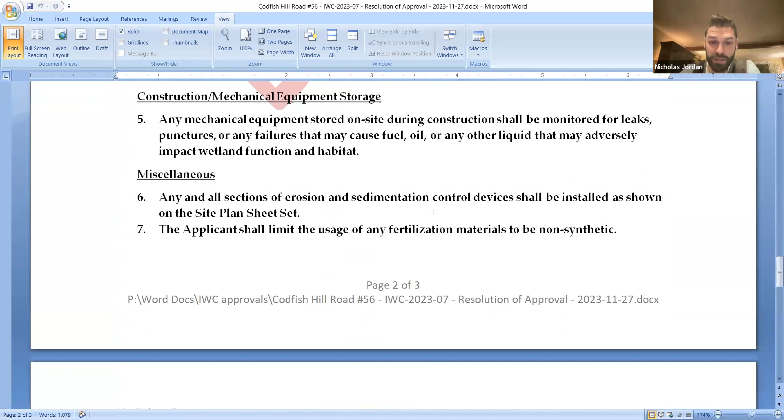Here's a condition that I will suggest as staff that the commission incorporate, that I'm just thinking of off the cuff. You can watch me type this on my screen. Nico, you can follow me. Just bear with me. They're small, right? Why don't you just pop one up on a tree next to the vernal pool and call it a day? Just use your discretion. Can we zoom in? Let me go to page width. Isn't this one of those things that we can leave to you, to our agent?

All buffer plantings must be installed prior to the issuance of a zoning compliance certificate. That's good. What does that mean? So that buffer must be installed and inspected by the inland wetlands agent. Oh, I see what you're doing. So is it in your purview to ask him to put up placards if you feel they would be beneficial? No, because I need to get direction from the commission for that. This is just a suggestion. If you guys don't think this condition is appropriate, then it's getting taken out.

No, I think that's good. Buffer plantings would be important before construction started. Well, without recalling the sequence of construction for this property, the buffer plantings will probably be one of the last things installed, because you don't want them destroyed while all this work's taking place. But before anyone gets a CO to live in this house, they're gonna have to get a zoning compliance certificate, and they'll have to get me to go out and take a look at the property.

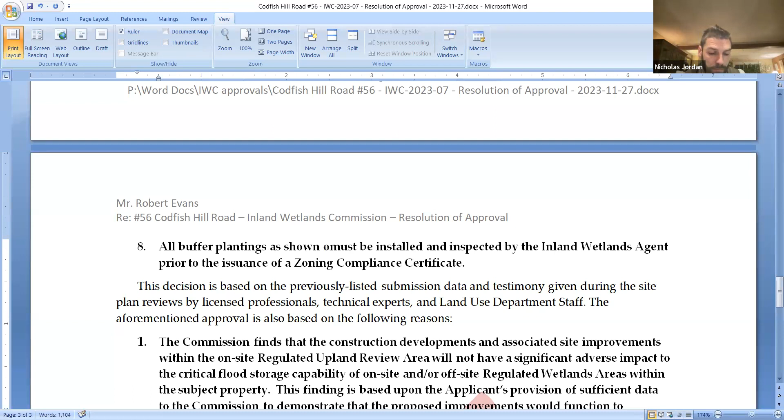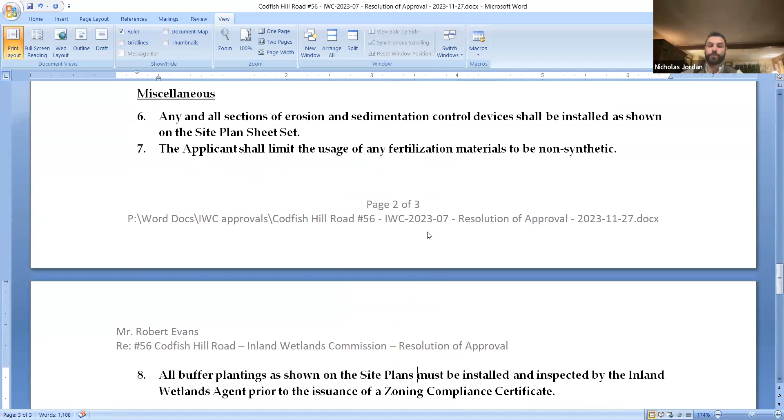If I go out there and those buffer plantings as shown on the plan are not installed, then guess what? No CO. Sounds good. Important, yeah. As shown on the site plan. Does anyone have any other conditions to add? Are they okay with the conditions initially included? Yes. Okay. So I make a motion that we accept the resolution of approval as written with David's amendment on condition number 8

to be accepted, and this would be based on reasons 1 through 3 as written in the draft resolution of approval. Based on reasons 1 through 3 written on the draft approval. Second.

All those in favor? Aye. Everybody, motion passed. Okay. Very good. Next up, wait for the next motion. So excited. Nashville Road. So I will. Let me save this. Thank you.

It was nice meeting you, Mr. Gill. You too. You must be a Bruins fan. Yeah. Are you players too? I used to. Yeah, it's the same with that. Two 14-year-olds. One plays for the Colonials travel team, so it's like, oh, nice, go everywhere every weekend. None of the schools had teams. Okay. So we had played on Berkshire.

So I am going to. There we go. Thank you, folks. Thank you. You're welcome. Have a great night. Have a good night. I will be in touch with you then about some of those things we talked about. Yes, thank you very much, sir. Yep. All right, good night, thank you. Good night. Take care. Oh, I parked and I had to walk all the way around. Can I go out? Yeah, you can go out, right down at the bottom of the stairs, great.

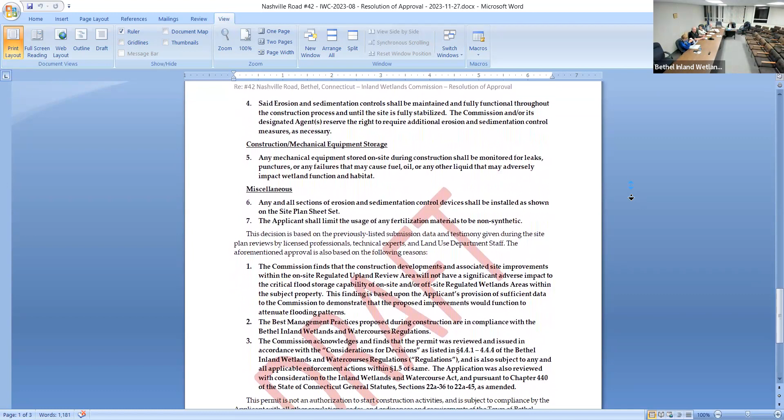Anybody else not eat dinner? I had my leftovers from lunch. I want that too. An hour ago was bedtime.

Well. That's all the same as the last one, right? Yeah, it looks like it. Majority, yeah. Put it in there.

In terms of the conditions and the reasons for your decision, they are more or less the same as what was initially presented to the commission for the previous draft resolution of approval. So if there are any specific conditions that you want added for this application, or if you want any conditions that were part of the initial draft to be revised, this is the time to discuss those. I believe we discussed adding the condition that the property gets a survey, right, that the wetlands get demarcated.

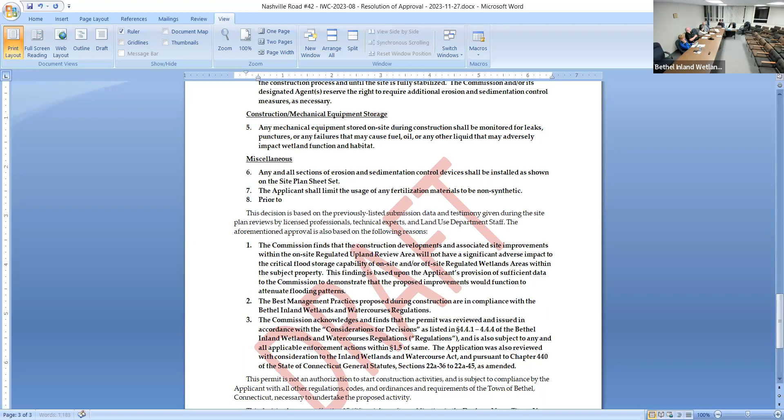Okay, hang on, let me bring this up on the screen. How do we word that? Because in this particular case, they needed to give us permission to do something. So I need a wetlands delineation, right? Is that what you're talking about? Hang on, we're getting there. He's got it. Okay, prior to the issuance of a zoning permit, the applicants...

Shall provide a... Danielle, I'd be coughing right on you. Sorry, Dave. I said, Danielle, I'd be coughing right on you right now if I was sitting right next to you. Thank you for not being here. I'm just gonna miss your puppies. Well, I can show you them in a minute. Can you continue with your train of thought, Danielle?

The applicant shall request permission to allow... I don't know what the name of the appropriate professional is. Were we going to ask for a surveyor, or a soil scientist? Well, a soil scientist is the expert that flags wetlands. A surveyor would be the one that locates where those flags are. So are you asking for both of those services to take place? No, I'm good with the survey. Actually, I don't want to die on a hill. But I'm asking, if the purpose of us doing this is to be aligned with our usual procedures, do we usually require both of those things?

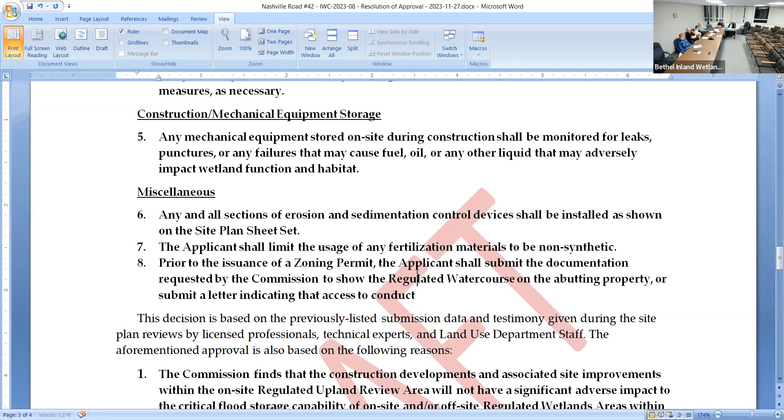How to write this... I've got it. Documentation requested by the commission to show the regulated watercourse on the abutting property, or submit a letter indicating that access was denied to conduct the delineation, and that the effort to conduct this work was not successful.

Does this serve the purpose that you wanted? Sure. How about you guys? Because you guys were just worried about some sort of legal precedent thing, right?

Well, primarily he said he went over there and nobody was home. Across the street, I don't even know if they know. It doesn't indicate that it has to be done by a soil scientist, though.

I'm just saying, we don't actually need a wetland scientist for this, because it's not a tricky wetland that has to be tested for soil. We know what it is, it's a drainage ditch, an intermittent watercourse. It's there, it's visible. That's the subject wetland we're talking about.

So is it worth putting this in at all? No, as long as it doesn't... as long as they're not trying to say... I wish to have it in. It was discussed, it was approved.

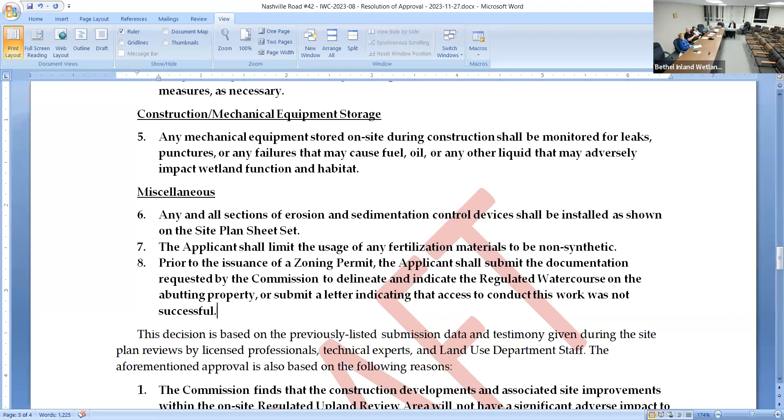The location of the wetland would be important because it speaks to the upland review area. If we don't know exactly where it is, then... but they're already before us, they're not trying to skirt the wetlands regulations, like shifting the upland review area by a foot or two doesn't seem to be changing what they're doing. Unless I'm wrong, tell me if I'm wrong.

Are they not following the stormwater management practices? Are they not collecting the water? Are they basically saying there is no wetland? They are required to, and if that was an outstanding comment from the engineer reviewing this application on the town's behalf, they would have flagged it. None of their review comments submitted to date reflect that the applicant is not adhering to the stormwater quality manual. They are adhering to it.

On the contrary, they're saying yes, there is a water course there and we are taking measures to not let... and all the water's being treated, to go back to my initial question, correct? Right, so there is a stormwater management system. There appears to be a stormwater management system that is going to address the water quality volume that would result from the development on this property. Appears to be, or that there is? There is. That was the plan review we just went through. That was my question. The guy said yes.

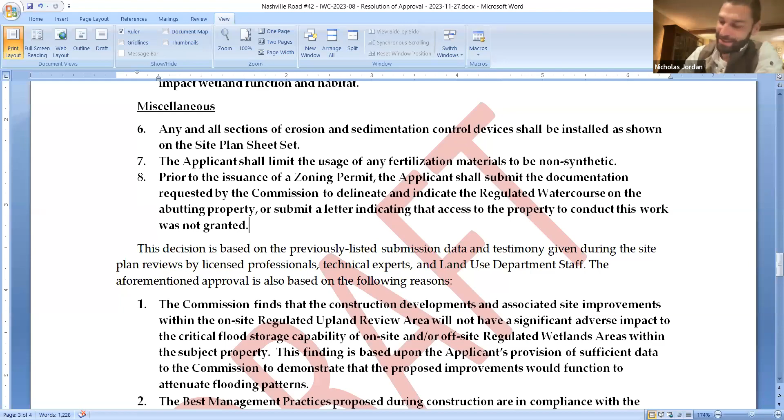Nashville, as part of the resolution. That's all Overlook land, isn't it Dave? Knocked on the door of that house. One looks abandoned, one I'm not quite sure what's going on with. I'm looking at the satellite right now - the one on the northern end of the property, I believe, is partially... God knows whose, along the road.

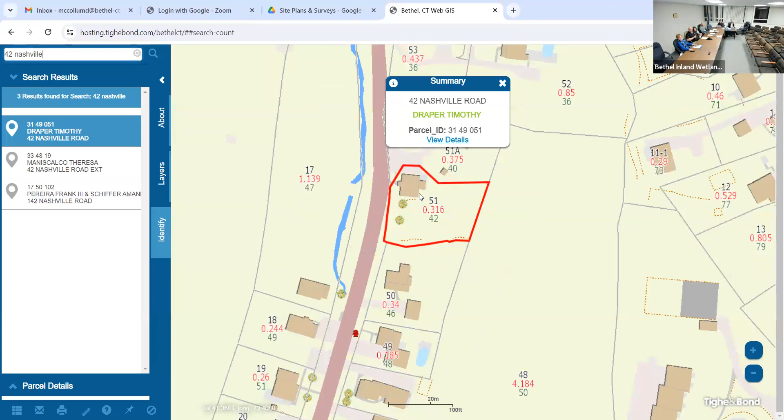So if we go to Bethel GIS, I'm going to bring this up on the screen so everyone can take a look. The property for this application is highlighted here in red. The property across the street is at 47 Nashville Road, listed to Maureen Campbell - that's all private, she owns all that property. It's contiguous with Overlook, but not part of Overlook.

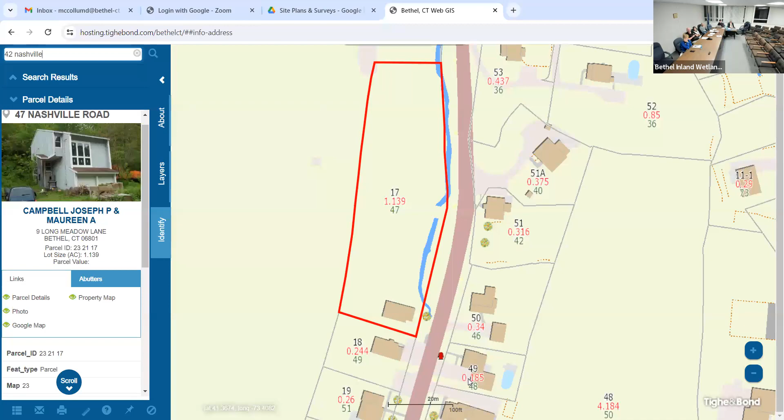Okay, that's correct. Very good - big yard, very big yard. It's not usable, it's all woods. I'm going to bring this back up on the screen.

Is there anything else the commission would like to discuss? Are we at the end of this? I don't think so, I don't have any notations for anything else. Just had to add that one stipulation. If there was something else, it's beyond me.

So I guess we make a motion to accept the resolution of approval for 42 Nashville Road, based on conditions 1 through 8, and reasons 1 through 3 in David's resolution of approval. Do I have a second?

I second. All those in favor? Aye. Aye. Oh, I recuse myself. You recused, yes, so it's the four of us. Okay, and there was one abstention - Pat had recused herself from that section. Very good, alright, super.